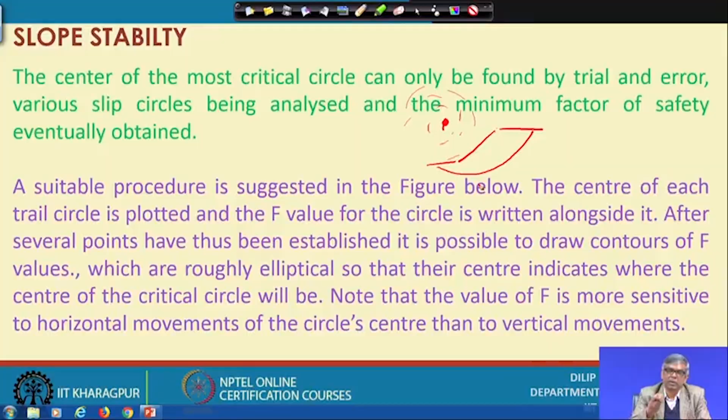If there is a slope, I will take a center here and consider a slip surface. After doing this analysis, I will find out what the value of factor of safety is there and write it down. Like that, I will change the center a number of times and also change the failure surface, and get another factor of safety. Like that, around this I will get a large number of points with different values of factor of safety, but we do not know which one is actually the most critical. So when I get a large number of points representing the factor of safety, finally the factor of safety may range from 1 to maybe 1.56, with large numbers of values in between.

Then what can I do? I can draw a contour of factor of safety of a definite value. Suppose I draw a contour of factor of safety 1.1, contour of 1.2, contour of 1.3, contour of 1.4, contour of 1.5, like that a number of them I can draw. And if I draw these, if done correctly, we will find a particular pattern: an elliptical shape of those contours, and the center of this ellipse will be the center of the critical slip surface. That is the thing we have to assume. Based on that we do the analysis.

You can see the center of each trial circle is plotted and the value of the factor of safety is written alongside it. That means, if I choose a point, whatever factor of safety I get, I will write it there. After several points have been established, it is possible to draw contours of values which are roughly elliptical, so that their center indicates where the center of the critical circle will be. Note that the value of F is more sensitive to horizontal movement of the circle's center than to vertical movement.

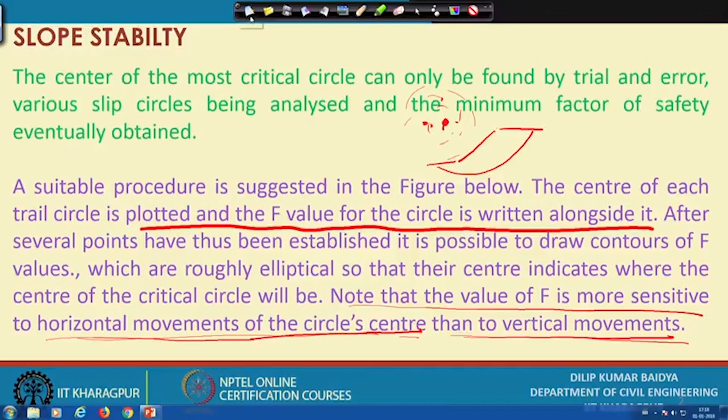So, there are some guidelines. Once you set this one, either you can go this side or this side, or above or below. Like that you can change number of points, and for each center of the circle you have to find out factor of safety, write down the value, then you will get number of values at different points, then finally you have to draw the contour. So, I will show the next slide what is actually done.

You can see here. So, this is the one. Suppose we have got 1 point initially, and a number of points, and finally we have got a contour of 1.39, contour of 1.36, contour of 1.38, 1.36 and 1.35 maybe somewhere here, and the value maybe 1.39, 1.45, 1.5 - there are a number of values there.

So, finally you could draw a contour of 1.36, 1.38, 1.35, something like that. And then you can see when you draw the contour it comes elliptical, and the center of the ellipse becomes the center of the critical slip surface. So this becomes the critical slip surface. So that is actually, finally, once you get this one, you can analyze and find out the factor of safety.

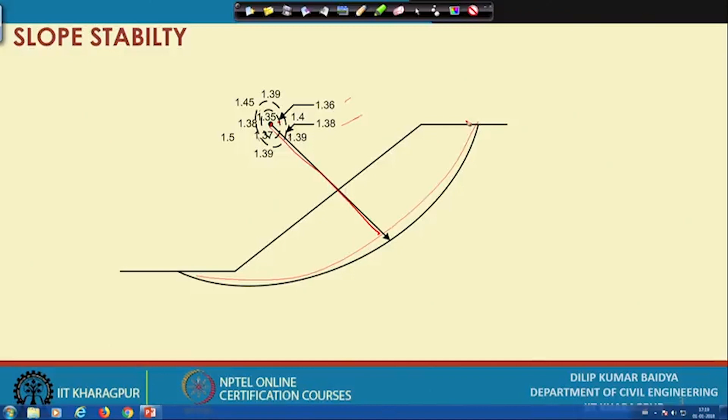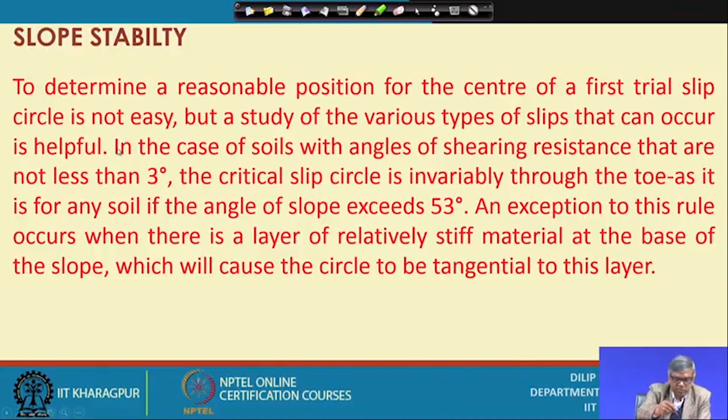Now, to determine a reasonable position for the center of a first trial slip circle is not so easy, but a study of the various types of slips that can occur is helpful. What people observe is that in the case of soils with angles of shearing resistance that are not less than 3 degrees, that means phi greater than 3 degrees, the critical slip circle is invariably through the toe.

That means, if it is greater than, so your slope is there and there, so it passes through the toe, like this. And this holds true for any soil if the angle of slope exceeds 53 degrees. So if this angle is greater than 53 degrees, then it always passes through this. That is the one observation.

An exception to this rule occurs when there is a layer of relatively stiff material. That means, if there is a layer here, a different material is here, then it can be different. If a stiff material is at the base of the slope, then for the same condition, whatever was going through this, it may go here and become tangential to this.

I will show in the next slide. There is a layer of relatively stiff material at the base of the slope, which will cause the circle to be tangential to it. One is, I will draw two slopes - one is this and this. If phi greater than 3 degrees and beta greater than 53 degrees, then your failure is something like that.

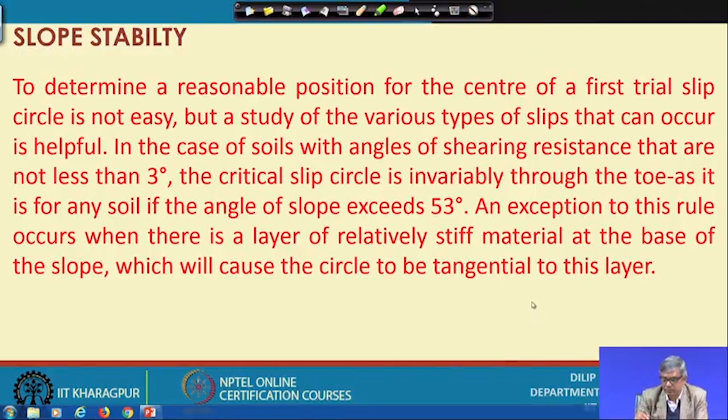But if it is a slope something like this, and there is a material here, then your slope can be something like this, failure can be something like this. So it will not reach there. That is what is shown in the next slide. Let us see that. Okay, next slide.

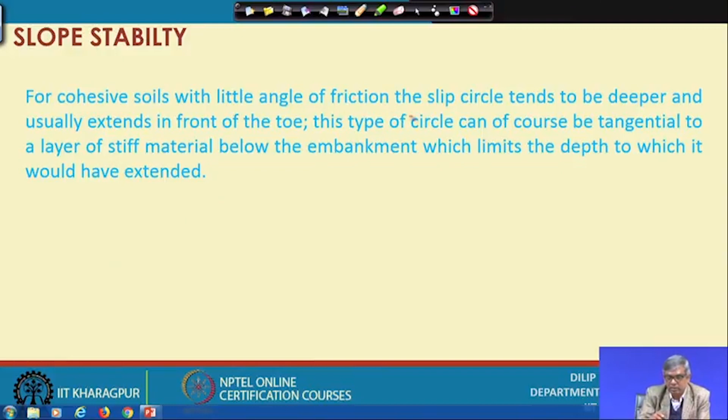For cohesive soil with little angle of friction, the slip circle tends to be deeper. That means if there is a slope here, there, here, generally it will be something like this, it will go deeper, usually extending in front of the toe, meaning it will go beyond that. So it will be deeper and finally it will be reaching here.

This type of circle can of course be tangential to the layer of stiff material. That means if a material is there, again there is a 2 layer, then it goes deep, but if the stiff material is there, it cannot go deeper - instead it will be tangential to that. So I will show the next slide.

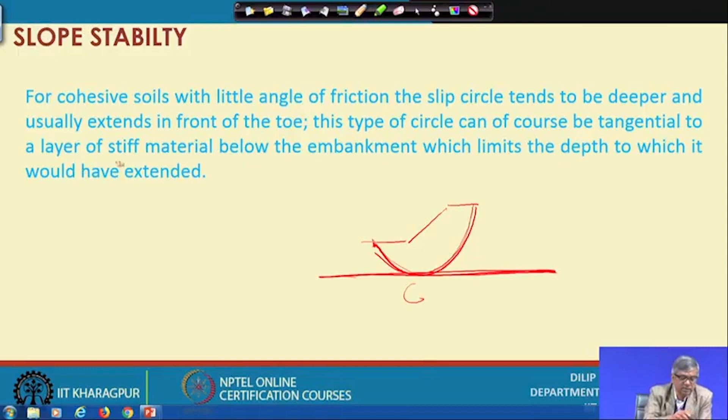You can see here, this is the normal. This figure actually does not look circular, but anyway this side it is extended. So normally you can see, if phi greater than 3 degrees and beta greater than 53 degrees, then it will pass through this and go like this. And if there is a layer of stiffer material at the base, then with the same condition, the failure will not come to the toe. Instead, it will become tangential and circular and reach above the toe. It will be something like that.

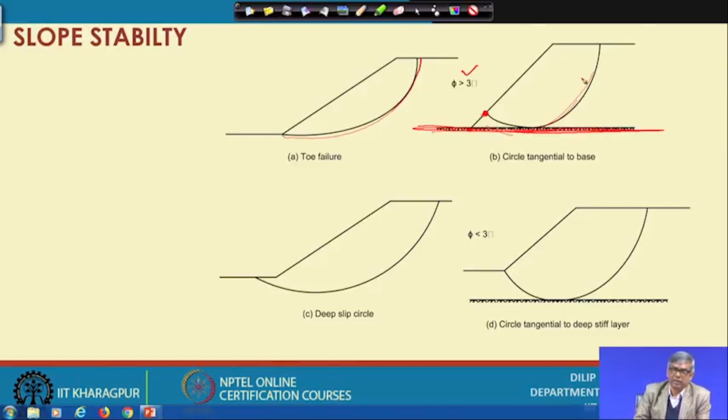When it is a cohesive soil with a very small value of phi, the failure surface will always go beyond this base level, and in front, failure will start in front of the toe. It will be slightly deeper than this level. And again, if another stiff layer is present here, the tendency will be to go here, but tangential to this.

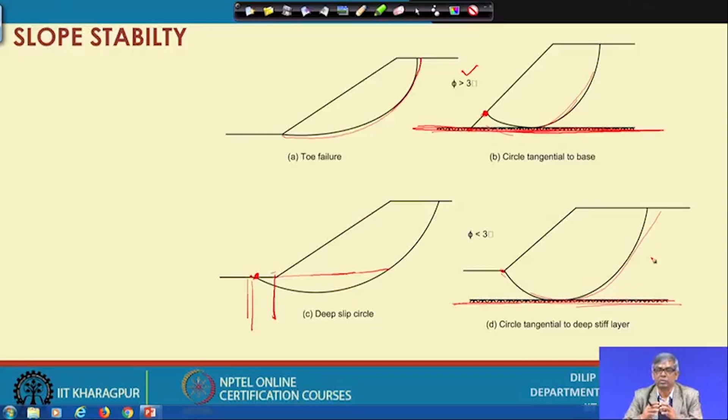So these are the various observations while assuming the slip surface for the analysis. How to start? You have to see the slope angle, you have to see phi, you have to see the cohesion, you have to see the base embankment material and the base material. Based on those observations, whether you will assume this surface or that one is to be decided, and then you can progress further. This is the initial observation you have to keep in mind.

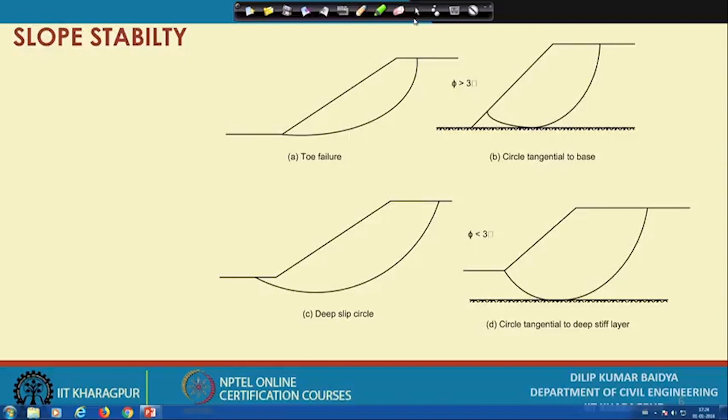Next thing is, if it is a cohesive soil, we can find out the center quite easily by a method proposed by Fellenius. For different types of slope, say 1 is to 0.58, 1 is to 1, 1 is to 1.5, 1 is to 2, 1 is to 3, 1 is to 5, the slope angle is given, and this angle alpha and beta is given. These two are actually provided by Fellenius, meaning you have to do some construction.

If a slope is given something like this, this is the slope angle — if this is the slope, then the angle is 60 degrees. If this is the angle, 45 degrees, this is the slope, this is the angle. If this is the one, this is the angle. If this is the slope, this is the angle. So these are the different slope angles.

So this angle is given, and Fellenius suggested a construction procedure based on alpha and beta to locate the value of phi, to locate the center. How to do that? You can see in the next slide.

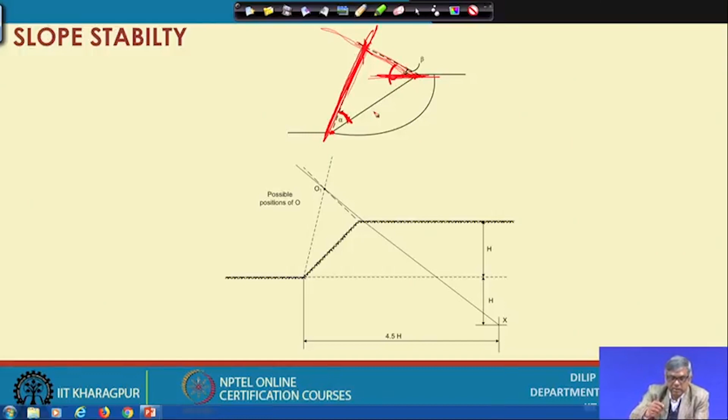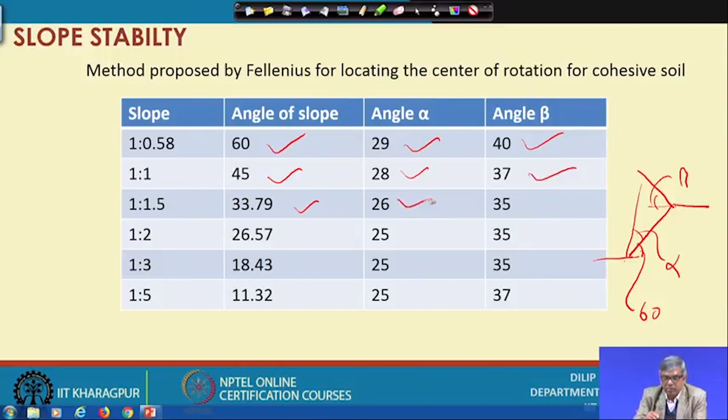So what is the value of alpha and beta? That is given by Fellenius. When the slope is 60 degrees, alpha will be 29 degrees and beta will be 40 degrees. So if you have a slope like this, this is alpha and this is beta. If the slope angle is 60 degrees, alpha becomes 29 degrees and beta becomes 40 degrees. Similarly, if the slope angle is 45 degrees, alpha is 28 and beta 37; if the slope angle is 33.8, alpha will be 26 and beta equal to 35. If the angle is 26 degrees, alpha equals 25 and beta equals 35; if the angle is 18.4, it is 25 and 35; and if the angle is 11.3, it is 25 and 37.

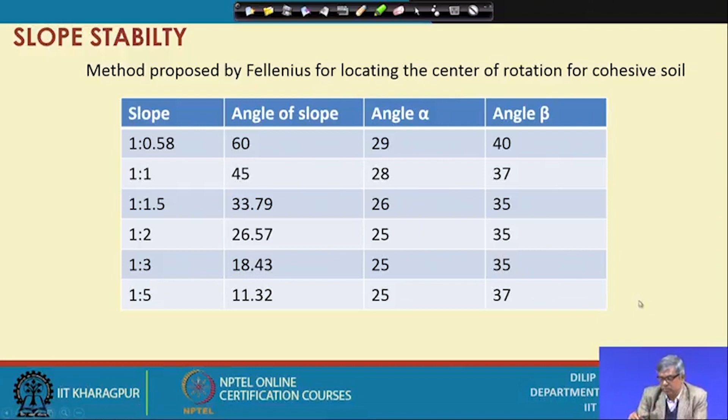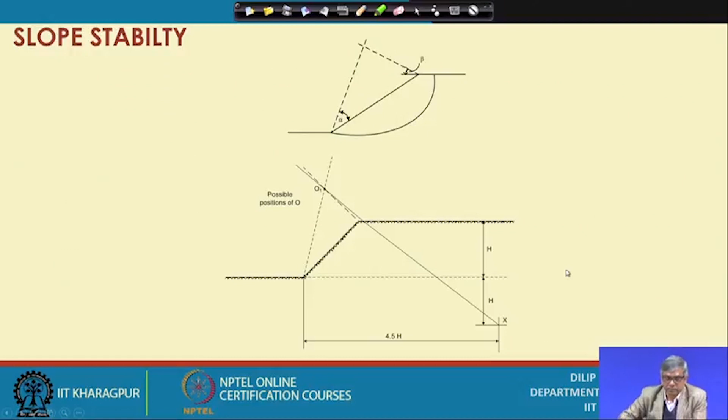So for different values of alpha and beta, you can locate the intersecting point, and this becomes the center of the trial slip circle. Taking this center, you can draw the slip circle, the slip surface, and then do the analysis.

But when it is a c-phi soil, this method will not work, and for that there is another method proposed by Jumikis, I think, and that requires a minor modification to be done.

Based on the tabulated value — suppose this is the slope angle, theta — based on theta, you take the corresponding alpha and beta from the Fellenius table, and you draw this, this is beta and this is alpha. If I do that, I get the center.

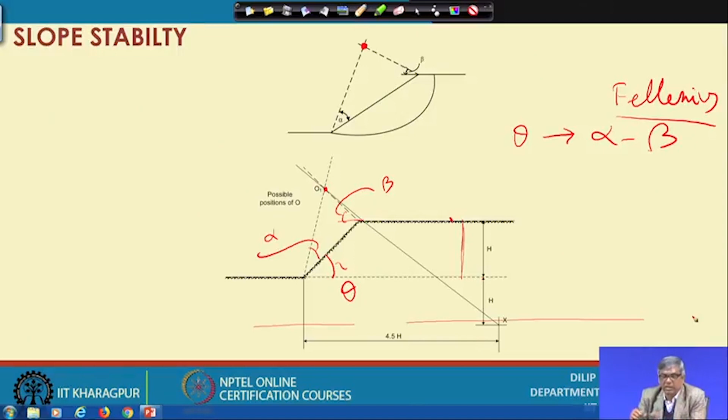Once I get this center, for C-phi soil, additionally I have to locate a point from here at a depth of 2h. If this is the height of the slope h, at a 2h distance I draw a line like this, and from the toe I also draw another vertical line at a distance of 4.5h, where h is this height.

So this is the vertical line I draw, and this is the horizontal line I draw, and they intersect at this point. When they intersect at this point, a new point X is located, and this point is finally joined to the original center of the slip circle, O1. So these two points, X and O1, are joined, and then you can extend it.

After extending this, for a C-phi soil I will not have the center on this point, but I may have the center somewhere along this line, either this side or that side. I can change the location along that line only. So I can select any point on it, and based on that I can draw the different slip surfaces and then do the analysis.

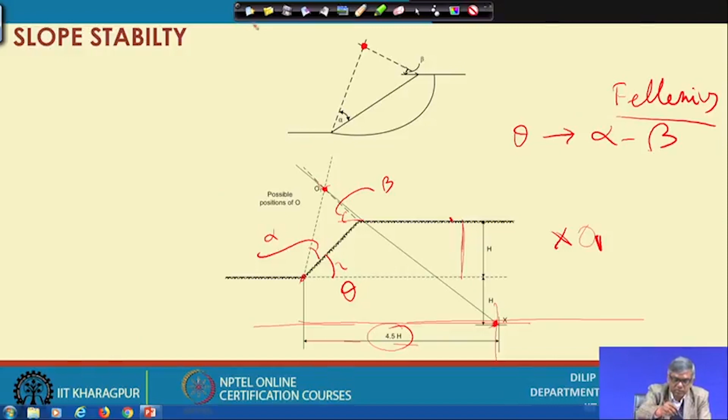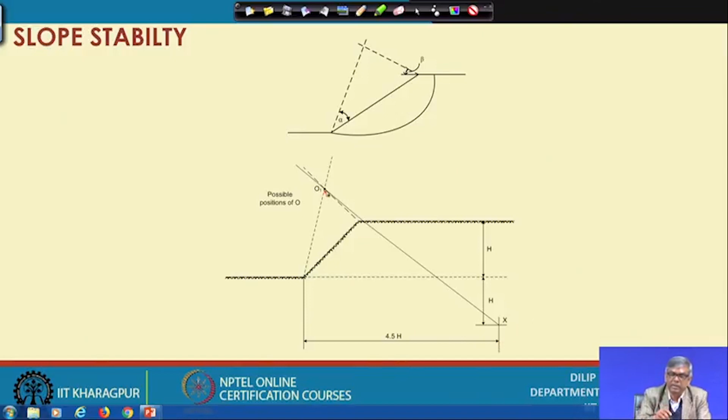So when it is cohesive soil, there is a method for locating the center. And if it is a C-phi soil, first you locate the center based on Fellenius, and then the second modification proposed by Jumikis is: locate a point at 2h below the surface of the slope and at 4.5h from the toe of the slope, then join that point with the originally located center by Fellenius, extend it, and on that extended line you get the new modified center. That is described in the next slide.

This technique is not applicable in its original form to frictional cohesive soil, that is, soil possessing both C and phi. What we did for C soil was draw a line from here and a line from here - this is beta and this is alpha, given by Fellenius. That is applicable for cohesive soil, and the same approach can be adopted with minor modification suggested by Jumikis.

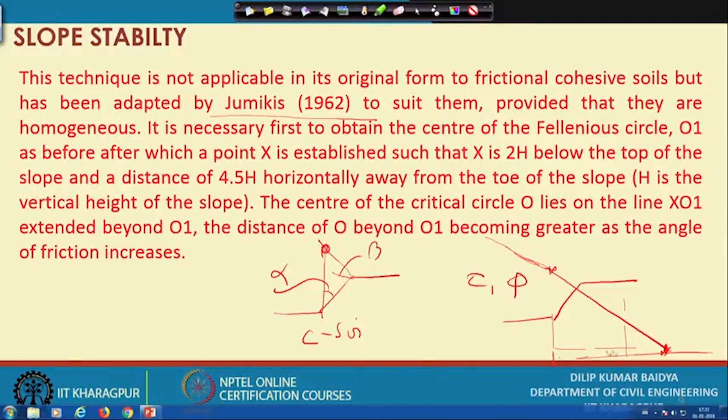How to do that: if the slope is here and we have the original center here, then I get a point at 2h distance and 4.5h distance from the toe of the slope. This distance is 4.5h and this is 2h. I join these two points and extend the line, and along this extension I get the new center. So that is the top of the slope, a distance 4.5h horizontally away from the toe, and the center of the critical circle O lies on the line x-O1, extended beyond O1.

So the distance of O beyond O1 becomes greater as the angle of friction increases. From O1, how far this center will be increases with the increase in friction angle. That is the new thing to be considered.

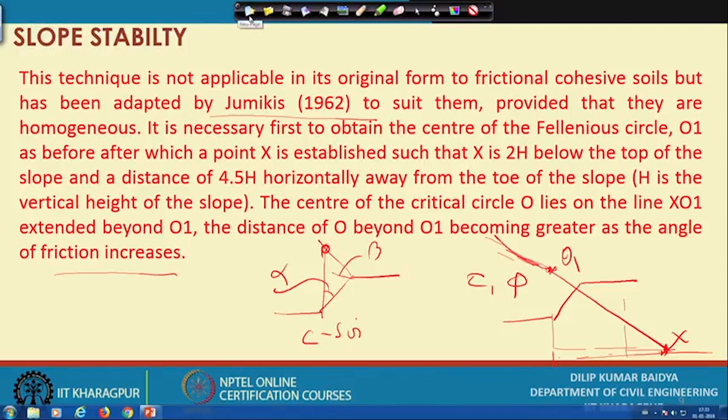So, for the approximate initial method - when it's pure cohesive or cohesionless soil, you have a planar slip surface and different methods of analysis as I mentioned. When there is C soil or C-phi soil, I can assume a number of slip surfaces and based on that do the analysis and find out the factor of safety.

While doing this type of analysis, we need a trial slip surface with a center, and there are different methods for finding the center. One method is to assume the center, find the factor of safety for a number of them, then plot a contour of these different factor of safety values, and the center of all those contours becomes the final center of the method.

Another alternative is to find the center for cohesive soil using Fellenius method, and when it is a C-phi soil, the modification suggested by Jumikis can be adopted along with Fellenius method to find the center.

So with this, these are the things finally required. Such a method can only be used as a means of obtaining a set of sensibly persistent trial slip surfaces when the slope is irregular, or when there is pore pressure in the soil - conditions are no longer homogeneous and the method becomes less reliable.

Whatever method we have discussed so far assumes a slope like this where the first condition is homogeneous soil with no pore pressure. What we are doing is considering the slip surface equilibrium and finding the factor of safety.

But when the slope is irregular - and most of us, when we open the newspaper now and then, we see landslides. What is a landslide? It is nothing but slope failure.

In hilly areas, suppose the slopes have a significantly high slope. During the rainy season, water will enter, pore pressure develops along with other effects, and then the entire slope sometimes slides towards the toe.

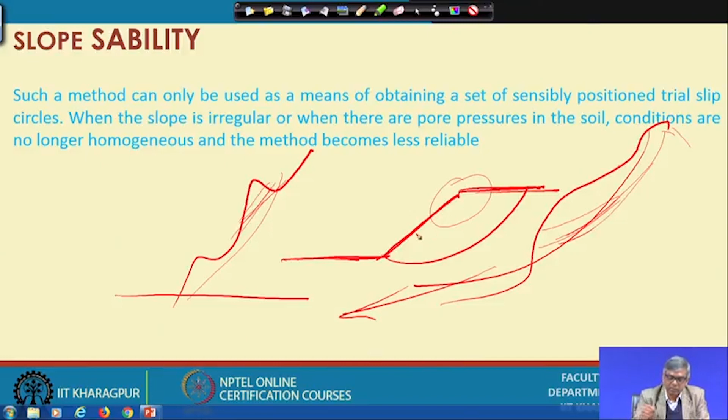For this, initially there was a method proposed by Janbu. Janbu took whatever may be the slope shape. If the slope is something like this, and we do not know how it will fail, a slip surface can be assumed, and in that case we can divide it into a number of slices.

We have introduced the method of slice, but that is not really a method of slice. There, to calculate only the weight of each slice, we simply divided it into parts - that was a graphical method. If I divide into slices on graph paper, by counting the number you can find the area, multiply by unit weight, and get the weight of each slice. From each slice we get the normal and tangential gravity forces - tangential force T and normal force N - then we took the summation of T and N as resistance and sliding force, and did the calculation.

So that is not really the method of slice. What Janbu suggested is that at any place on the slope a slice is taken, and equilibrium of the slice is considered. That means the slice is isolated, and then we look at what forces act on that slice. Earlier we considered only normal and tangential forces, and not the forces at the slice sides.

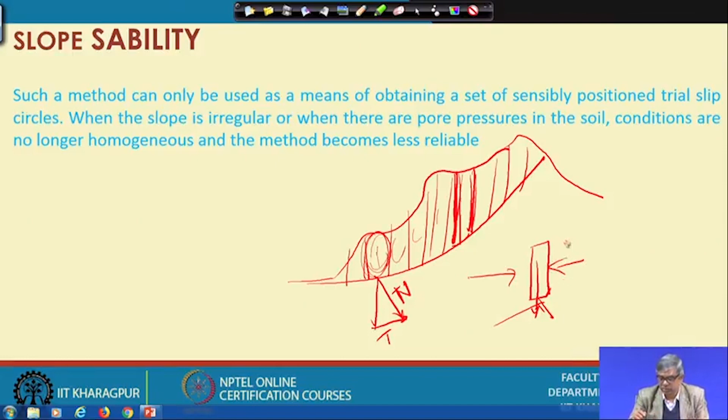So now Janbu suggested two side forces - from this side and this side, the forces will be different. Considering the equilibrium of this, whatever number of equations we have and whatever number of unknowns we have, the unknowns are more, and because of this the problem is indeterminate.

But Janbu, to initially solve this problem, assumed that for a small slice, the left side force and right side force are equal, and based on that he gave a solution. It was working well and was quite tedious but accurate. It requires repeated calculation, and it was developed very early, in the 60s.

Later on, when computers came, people programmed the method, and instead of doing repeated hand calculation, you can give the input information, program it, and instruct the program to do the calculation repeatedly to find the final value of factor of safety. That was one method.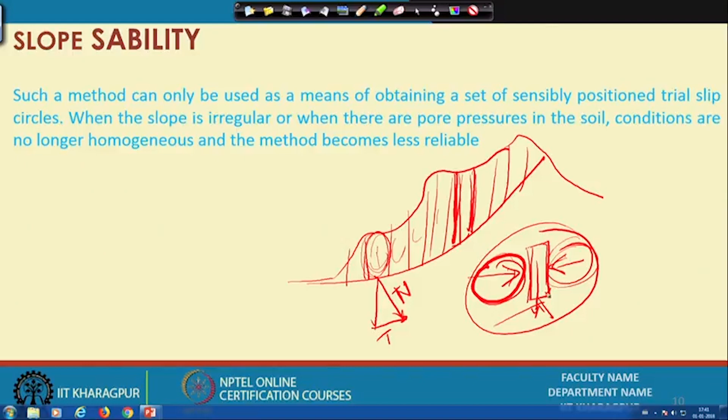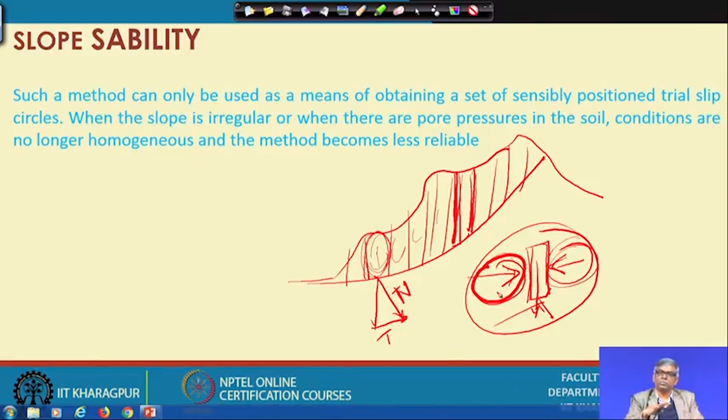In this method, the limitation was that Fellenius considered the left side force and right side force equal, but there are also other methods - Janbu and Bishop. This is originally known as Bishop's simplified method of slices, and later he introduced modified Bishop. Then there is Janbu's method, and many others like Morgenstern have suggested using this concept, and finally their concepts are programmed, and a number of software are now available to do slope stability analysis.

Whatever may be the slope, regular or irregular, whatever the height, whether there is water flowing or it is dry or partially saturated - any condition - we can program it and get the final factor of safety. This is somewhat advanced and requires a lot of calculation, so much that it is not possible by hand, and nowadays no one will be ready to do that since computers are available. In fact, there are many ready-made programs that people generally use.

Giving an introduction on the program itself is out of our scope, but how this method works, I will give some brief description in the next lecture. Okay, thank you.